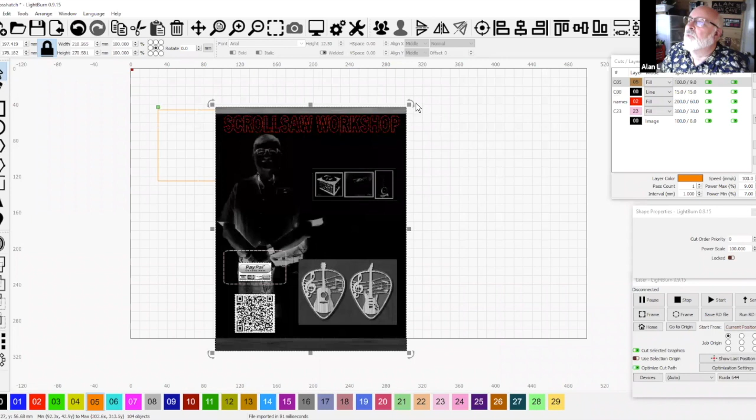That was ugly. You're not going to explain what that was? You're just going to let it go? That's the next lesson, don't get ahead. Don't get ahead.

All right, so now I've made an exact copy of it. I'm going to overlay the two together, and I'm going to take this and go to 1 millimeter. And then I'm going to go here, and can you do negative 45?

I think so, let's try it. Yeah, there we go. Okay, let's try it. And then look at them, and there's your crosshatch pattern. You can zoom in, and it's 3 minutes.

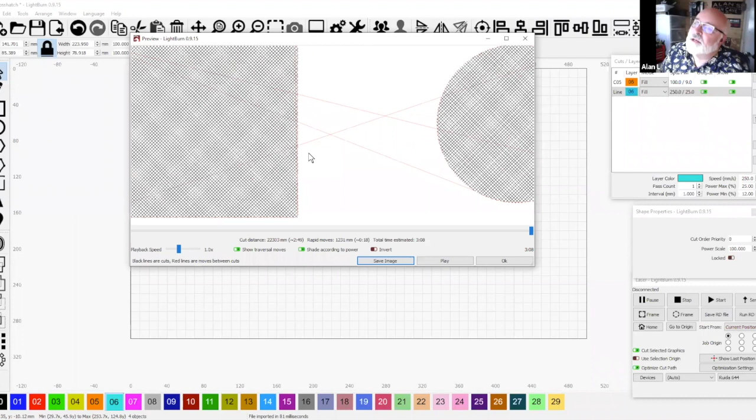Hey Alan, can you go back and double click on the orange line in the layers box? So yeah, okay, so what's that crosshatch button there? Right next to your cursor. I don't know - oh look, it automatically does that.

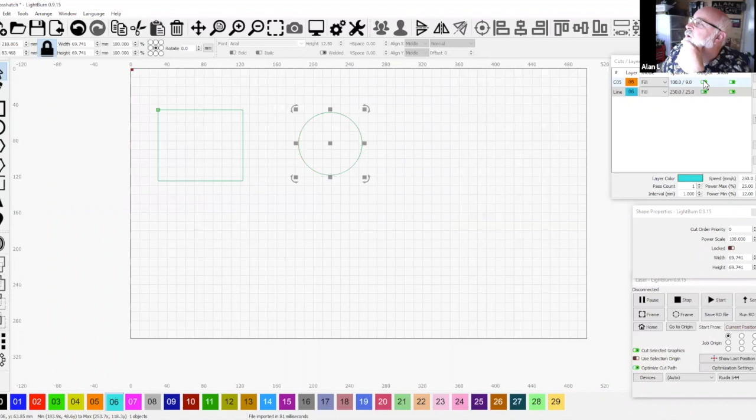So now let's try this - well, output the other one first, see what we get. Oh yeah, we can do it this way. Wait, we did it on orange, right? Yeah, I think so. Okay, so it's there, so you don't even have to double up on it. Except it's 4 minutes.

Oh yeah, it increased the time - isn't that weird? Did he accidentally get both? I didn't hear that, did you accidentally get both the orange and green? You're so fast - well, he said not to output that one. So I took the output off of the blue. Okay.

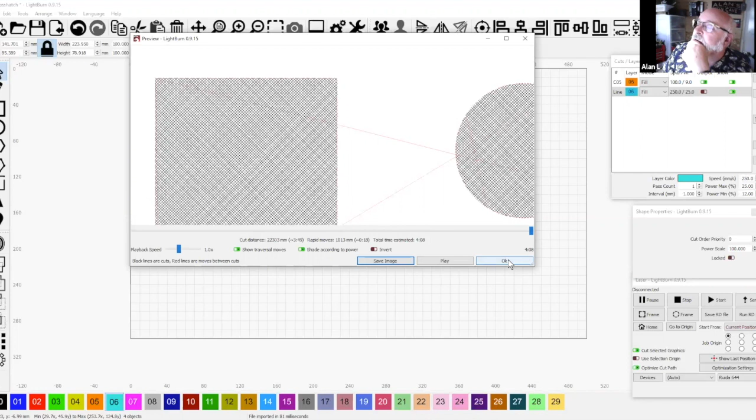Since we're only using the orange, we can go up here to 3. Is this a 3 millimeter line interval? Yeah, this is 3 millimeter, took it down to, and it's only using the one with the crosshatch button flipped. Oh wait, Alan, you had blue at 250 millimeters per second. That's why the blue was faster. It gives you options to do some really cool stuff.

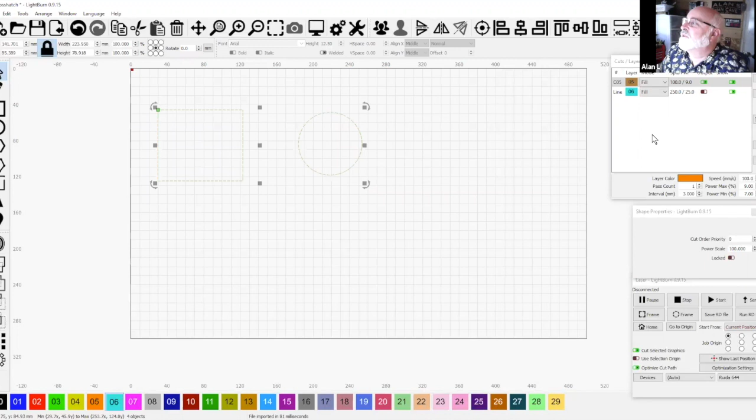Except now I have to get rid of this. I just wish my icons were that big. Remember my icons, Travis? Yeah, when you look at it...

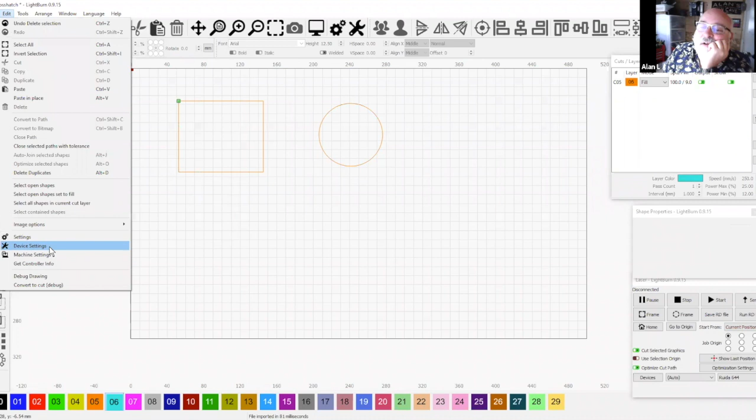Alan, can you show us where you went and chose the different icon sizes? Honestly, it's either machine or device settings, or maybe it was just regular settings. Go back into the regular settings because that would be the software itself, I think. Because mine are teeny tiny, you can't even see them. Yeah, here we go, toolbar icon size. Show us his size by going to the far left. Mine are smaller than that, actually.

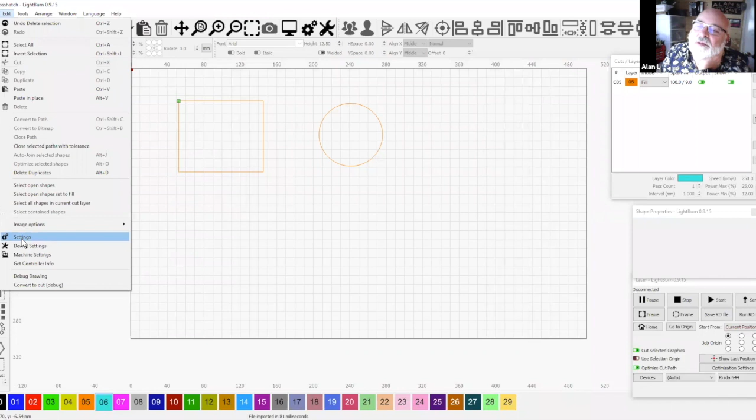Wait, who said that? Mark, where'd you go with that real quick again? How did you get to this? Go to edit, settings. And that's in the old version too? Yeah, that's been that way for a long time, I don't know how long. And it follows you across when you upgrade - that settings file follows you across.

Alan, you may well have made his day. Yeah, I think so, this was worth it, I can leave the meeting now. I fulfilled my mission in life tonight. Well, you know, it's like the man said, you have to learn one thing a day. So there you go. That's right, he's done that, so he's leaving. Bye-bye.

Anyway, so that's the crosshatch pattern.

That was my excuse if 0.9.15 hadn't showed up. Man, that was right, some timing, Alan, that was some amazing timing. It was, except that I had to sort of scurry last night, and some of this is not fun.

So I'm gonna do the QR code one next, just because it may take a few minutes. What's a QR code do for you, Alan? It generates this QR code. See this QR code right here?

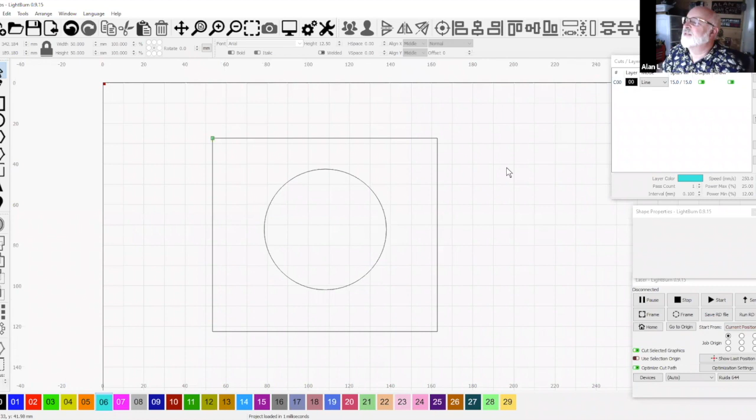Other than that, I haven't seen them used a lot. Yeah, they're in magazines, about the only place I see them, and they take you to the people's website, or a TV channel. That's how you get to their website, you've got to take a picture of the TV screen.

Alan, this looks like what I use every single intro to laser class. Maybe that's why it's just ingrained in the back of my head.

All right, so this is tabs. I spent about 3 or 4 hours playing with it, so I got a pretty good understanding of it, but some of the things are not super intuitive. It did say manual and automatic, right? Yeah, that's under the thing here, he's going to show you.

So here, come on, here you got automatic. Oh, woo-hoo, it's there, okay. That's some tabs, that's a few tabs.

Or you have manual, and I haven't played with the automatic one, so I've only played with the manual one. You can put the automatics on, then flip it to manual, and you can edit them. That's what I like. Oh, really? Yep.

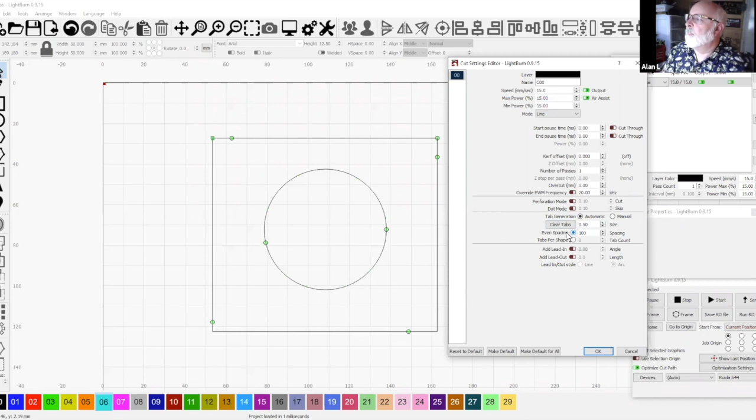So like you can delete the ones you don't want? Yep, if you double click them, they delete. You can also grab one and drag it along the line? Yep, you sure can. Okay, whoops, they turn it on.

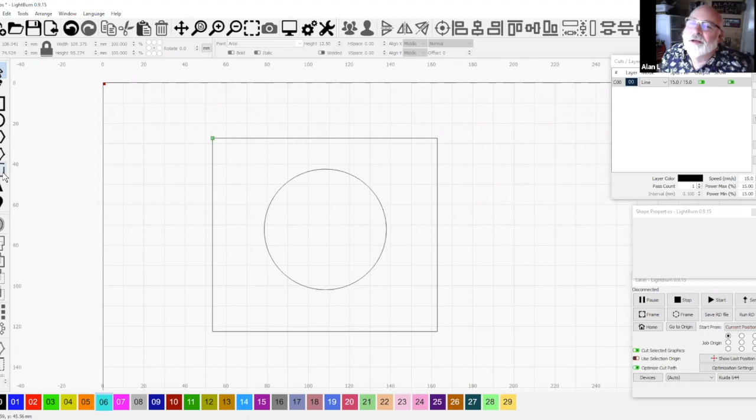So to see them, okay, let's go back here. You can't, there's tabs on there right now, but you can't see them. So what you have to do is go here, and you have to know where they're at. Or you go over here and click the tab button.

Alan, is there an indicator anywhere that this was something that had tabs on it, other than choosing the object and then selecting the tab icon? Is there an indicator of some sort? No. Clunky.

So here's the problem. If you turn it on over here, and then use that black line, because I use black for cut, that's just my favorite color for cutting. If I came over here and drew another square, thinking I was going to cut another black square out, I could cut another black square out, but it's going to have tabs on it.

Oh, because it's associated with the layer of black? It should be. Maybe it's not here. No, it doesn't make sense that it would have tabs by default just because it was the same line, I don't think.

Well, then how do you turn it off here? What do you mean turn it off? You can click them if you want, Alan. You know what, I think the reason it's not showing tabs is I set them really far apart. Now let's look and see if we can see a tab up here. No, I didn't put them in.

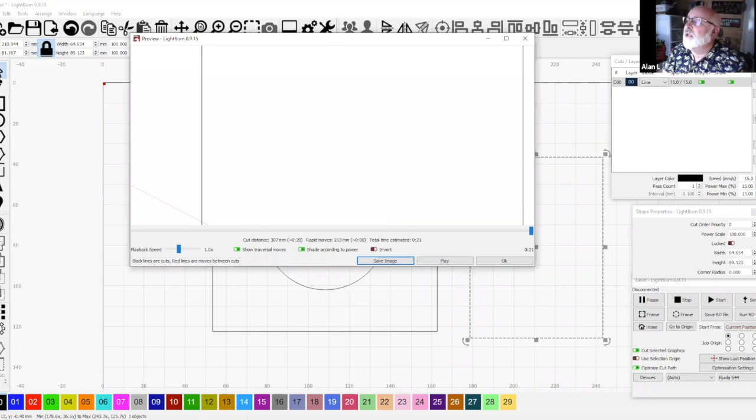So it must be by shape. Yeah, that kind of makes sense to me. So if you turn the button on, see there's no tabs there. Right, so now I can put a tab on the four corners or four sides.

We saw you drag the tab like we can in VCarve. Did you also then delete and add? How did you add, just click on the line? Yeah, you just click on it.

So I think if you double click it, or click to highlight a tab, it goes away? Yeah, if you double click on it, it goes away. If you just click on it, it goes there. So you can put as many on as you want, then take some off.

Did you define the width of the tab in that definition area? Yeah, it's right here, it says size. Okay, that's the width of the gap that you're going to leave in the line. All right. So you can do tabs. Oh wow, interesting, you can do, here we go.

Tabs per shape. I only want 4 tabs per shape. Okay, so now look, it gave me 4 evenly spaced tabs. Well, except for this one. Now those may be sort of evenly spaced. I don't know, yeah, they look like they are.

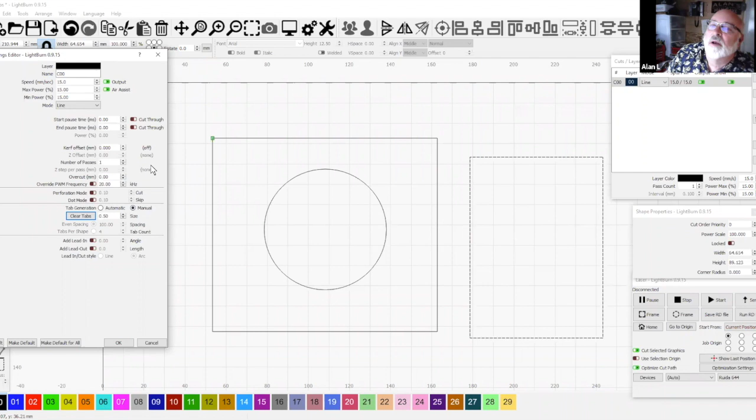So the other way to do this, right, is go down here to clear tabs. Yes, okay, and go to where is it? Perforations. Oh yeah, that was what you showed us last time. But I don't remember where it is now. It's right there, Alan. Oh, have it, there it is. Right here, so you go to perforations, okay, and you go cut.

100, skip 0.5, but you can't tell where they're at. Oh yeah, and it generates it. It doesn't have a starting point. Because that is made to cut a perforation across a piece of paper, not to do what we were doing.

So now this ought to be funny, what happens here because I told it to do perforations and tabs. Ooh, it's going to be really messed up. No, perforations took preference over the tabs. See, the tabs are still grayed out. It does show tab indicators on the vector. Yeah, I don't know, that's worth playing with.

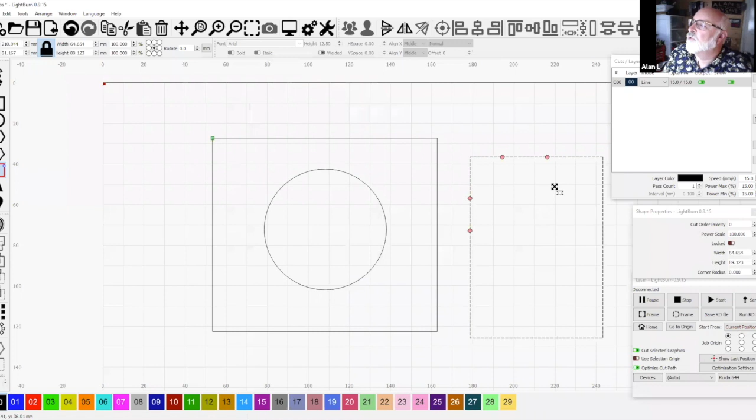But the good thing about this is you can move these tabs to where you want them. Which with the perforations, I set them up at, I don't remember what it was, 100 millimeters and 0.5 or something, you got them in bad places. Now you could play with the numbers and get the perforation out of that bad place, but on the other side, it may go into a bad place then. With these, where you can place them, because if you put a tab at the corner, that's bad, because you're going to break it getting it out. You want the tab in the middle, and that other one you could not do with perforations.

Well, you could do it on a square or a circle, but that airplane, which had a whole bunch of different directions, all kinds of ways, you couldn't do it.

You know, the one thing I didn't like about it either, Alan, is you can't do a thickness cut on it. Like I was playing with it today on the laser, and you got to make the tabs almost micro, like a 1/10 of a millimeter or 2/10 to be able to snap. Even on 3 millimeter Baltic birch, it was hard to snap them if they were too large. Yeah, you got to cut them if they get too large.

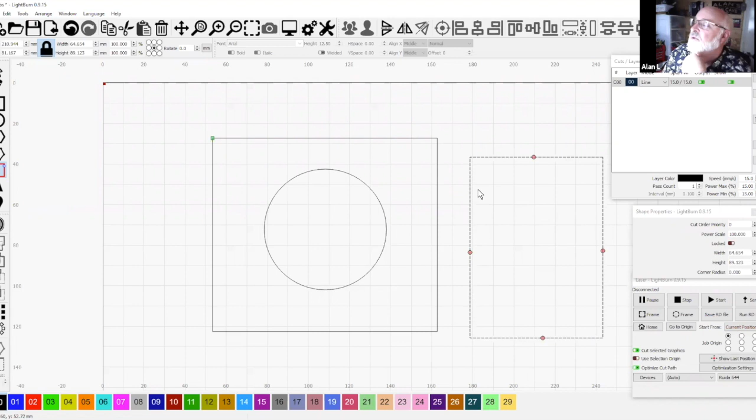And then were you playing hooky today? No, at lunch hour. Goody, our lunch hour, okay, good man. Good. But so that's the tabs. The tabs, yeah, good. Tabs.

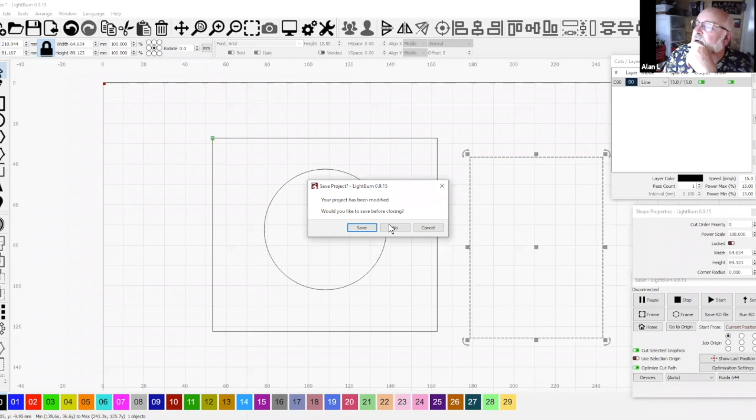Let's see, what was the last one here? Word bending. This supposedly is better than it was before, but I can't see that. It says it keeps lines straight, so I put some hyphens in here. Oh yeah, and it seems like, I don't know if it bent them before or what, but it still bends them a little bit when you get them all the way around. But what did it mean when it said it also did better with straight lines? And that's what I think they were talking about, was these straight lines. Oh, it didn't warp them or something. I see.

That seems like a feature that's really full of potential. I haven't really used it, but man, look at that power. Oh, I use it, so I make all those stupid coin things to play with, and this works perfect on them. Yeah, the old way where you did object align or whatever it was called, sometimes when you saved it and you brought it back up or you moved it, they didn't move relative to each other, and you'd have to start over again. But this one seems to be perfectly fine about moving around and staying the right way.

Nice. Can you edit that text right now? Yes. Okay.

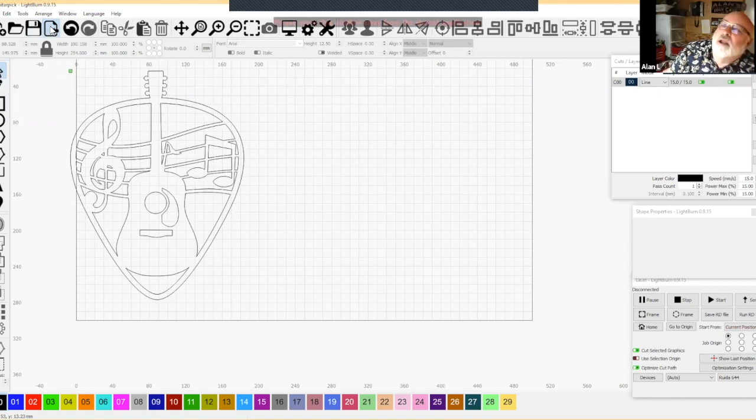But that's only part of the problem, because there's a back to that, right? And another side. So if I go up to this button right here, this is the import button. You can get the import right here, or you can get the import right here. Now the problem with import is it will take the last place you imported something from.

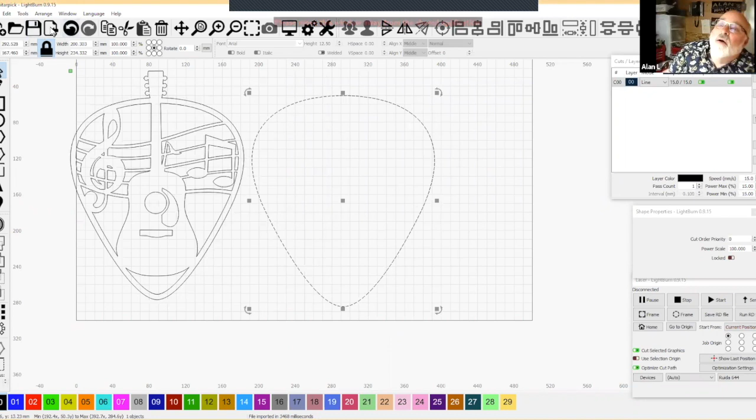So I'm going to go back to guitar pick, and I'm going to go to page 5, because that's where I want to be. Now I got the back, that's the back to this thing. And now, for the rock and roll crowd, look, wrong way. There's an electric guitar, acoustic versus electrical. Okay, so now all you got to do is take this and copy it and bring it over here.

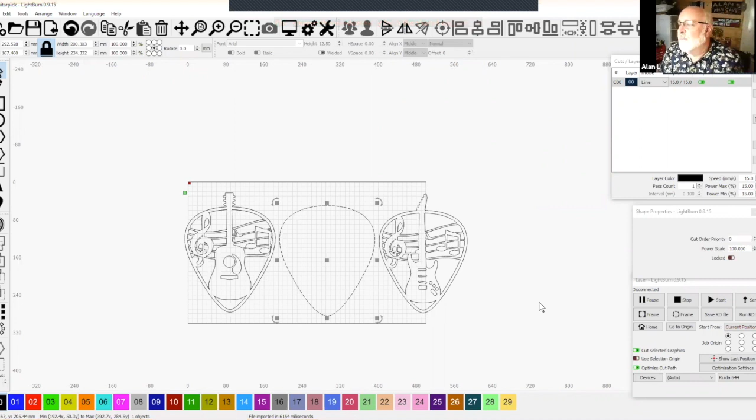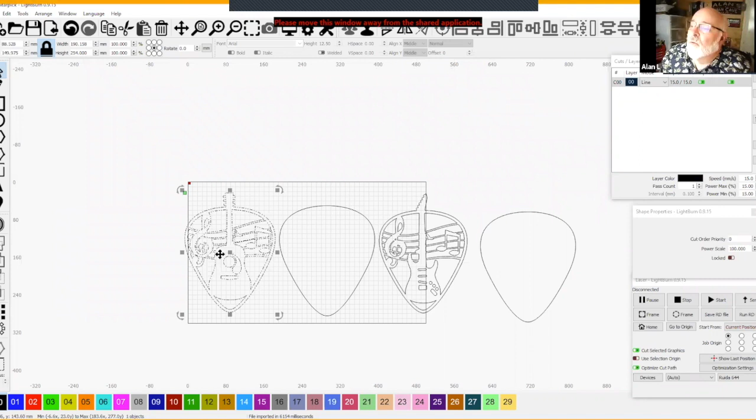What was the project again, just out of curiosity? So it's called a guitar pick, so it looks like a guitar pick. Is it just like wall art or something? Yeah, it's just wall art. You can take it down small and make it a necklace or a brooch or whatever you want. Oz promised this to you a long time ago, didn't he? Yeah, he did. No, he didn't promise it to me, he said they were working on it.

But what I'm going to do is take this and paint the back piece white and the front piece black, so it contrasts a lot. And then I may do it the opposite way too, just to see which one works better. You of course mean on a scroll saw, right? No.

So he said, you know, I harass him, I send him emails every once in a while. He's like, you know, you should do this on quarter inch, you should do this on half inch. It's like, dude, I do everything you send me on 3 millimeter. So if it's like this, where there's 2 pieces, 3 millimeter works perfectly fine. On a scroll saw, if you're going to do that, 6 millimeter is actually easier to cut than 3 millimeter, because it's too easy to cut 3 millimeter.

So what I usually do if I'm going to do it on the scroll saw, if I was going to do this one here, I would stack up 3 pieces of 3 millimeter and stack cut it, and then I'd have 3 of them. It's easier to cut when it's 6, 9, or 12 millimeters thick. But the laser cuts really fast on 3, and it would take me probably a couple hours to cut that on a scroll saw, 10 inches tall. Randy's better though, he could do it faster. Rookie.

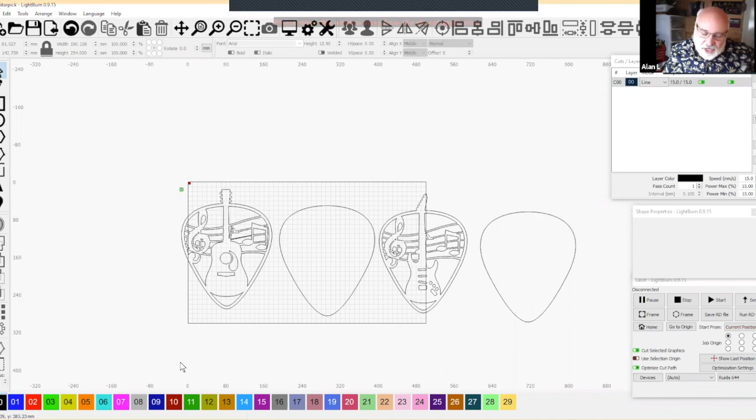So let's see, we've gone over crosshatch or etching with more distance in between the lines, and we found the crosshatch button. Thank you, Travis.